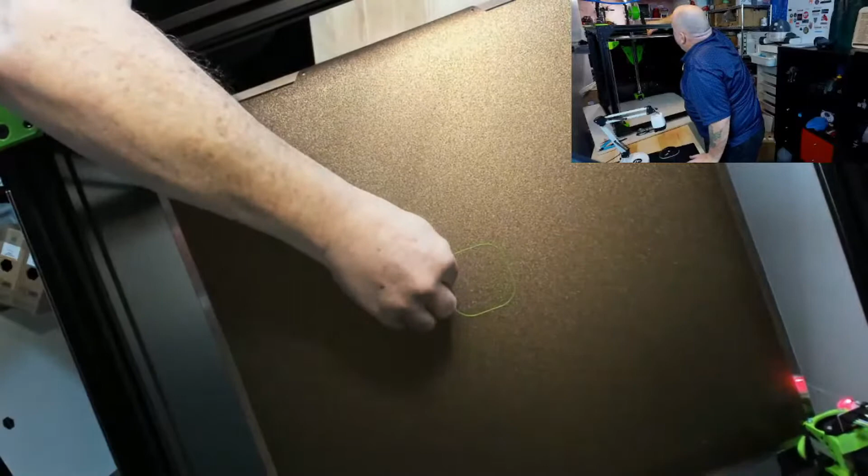So we're going to do that really quick, then we'll do a test print. What I did up here, just prior to the stream, this finished about 5 minutes before the stream. Let me get this off the bed too. You ever do that and get a piece of filament under your thumbnail? Ooh, it hurts. So let's have a look here.

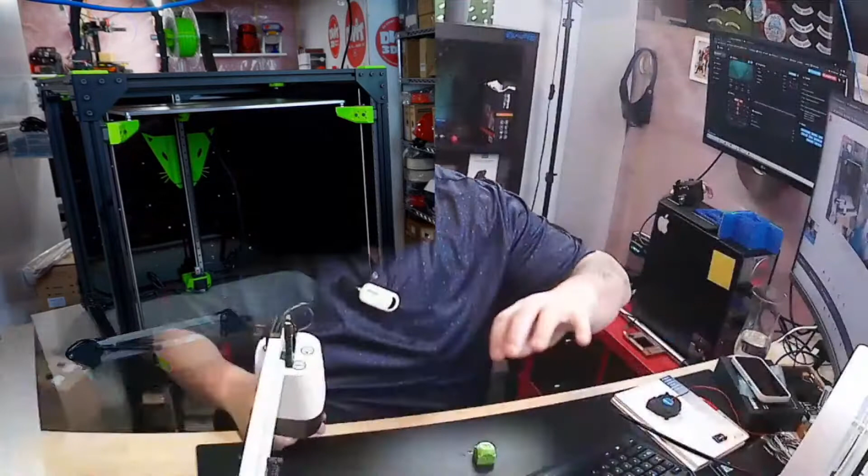I had sent Tom the STL file for the RatRig logo in the back of my case here. He'd asked me where I got it. I didn't find the file anywhere, I actually just went into Fusion 360 and created it myself - I vectorized their head and created the file. So if anybody wants it, reach out to me, I have no problem sending it to you. But I haven't put it on Thingiverse or anything yet - I don't really do Thingiverse as far as uploading stuff much, I'm not even sure how. So we sent them that. But thank you so much, Tom, much appreciated.

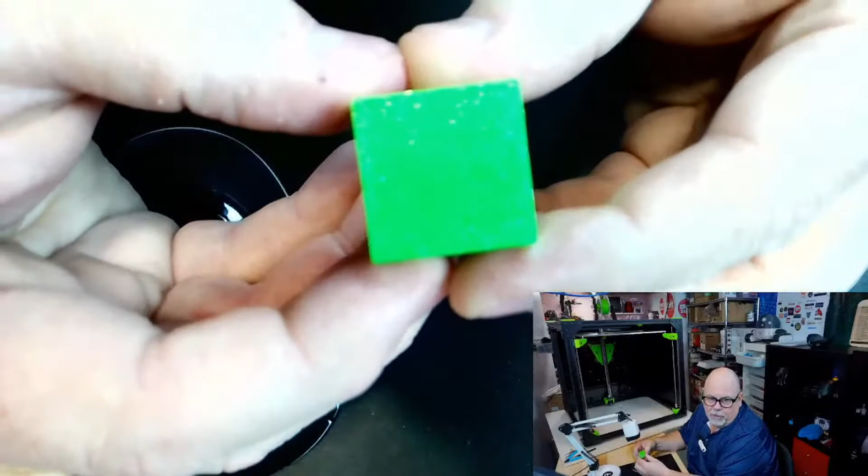So we did this cube just before the stream, and I'll show you - we still do have a little bit of ringing here, but when I do the calibration it should help it a bit. The bottom of the cube turned out quite nice. I have no problem with my first layer on this machine at all now that I've got my Z offset figured out perfectly.

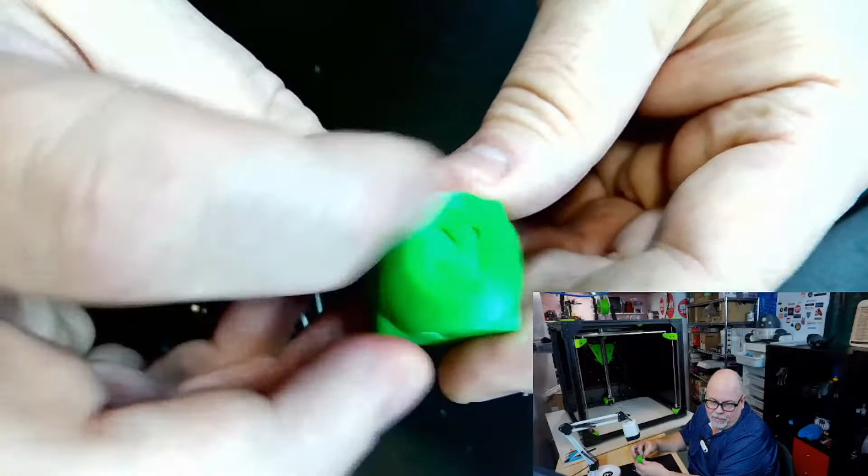X isn't bad - are you going to focus for me here? X isn't bad, okay. And you see on the Y, we've got some ringing on the Y. The back of the cube is not bad at all, and again on the other side there's some ringing because that's on the Y axis as well. The top turned out decent, other than right there, there was a little bit of bleeding of the filament at the end.

But the top and the Z look fine. So,

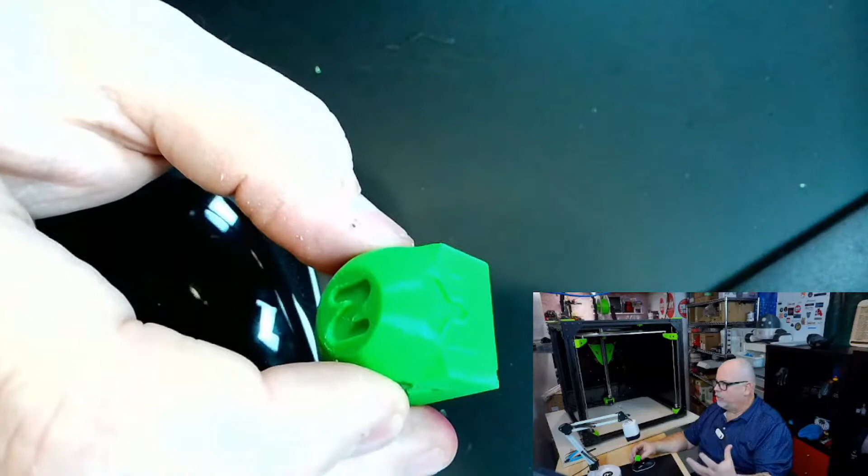Can you share a public link to the STL file from Fusion? I don't know, Jason, can I? From Fusion 360? Oh, I probably could. I'll look into that and see. I think you can, I think there's a way to go in from Fusion 360 and do a public link to my Fusion 360 repository or whatever it's called. I'll check that and see. Good suggestion, very good suggestion.

And I can also share the Fusion 360 raw file if somebody wants to go in and customize it. Yeah, that's a great idea.

So anyways, we're going to do the resonance calibration here again, and I'm going to reprint this cube. I had done a couple cubes last week after I fixed the hot end.

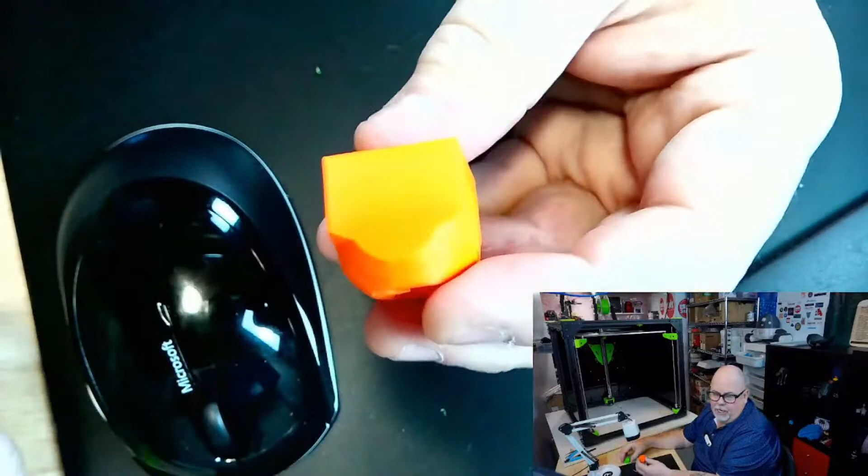I ran this cube in the PETG orange that I have on here. Everything I'm showing you right now is PETG, and it is working. Oh, and Jason says yes you can. Oh, I thought you were asking me if I could, and you're telling me I can. Okay.

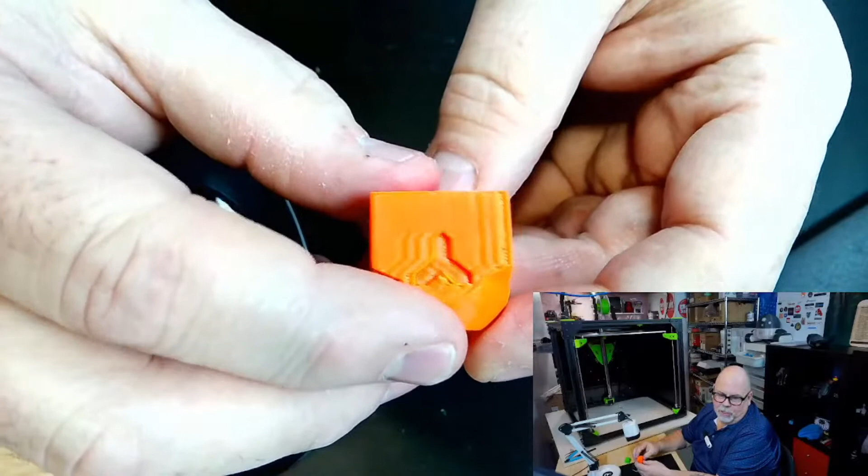So yeah, everything is done in PETG. Again, we had some ghosting or ringing on the Y, but the X looked perfect.

And then I ran another green one after. Since then I've run, somebody out there might know what this is for. This is a different hot end mount for this printer, which is going to be going on soon. If anybody can guess what kind of a hot end this is for, you win the Kewpie doll prize.

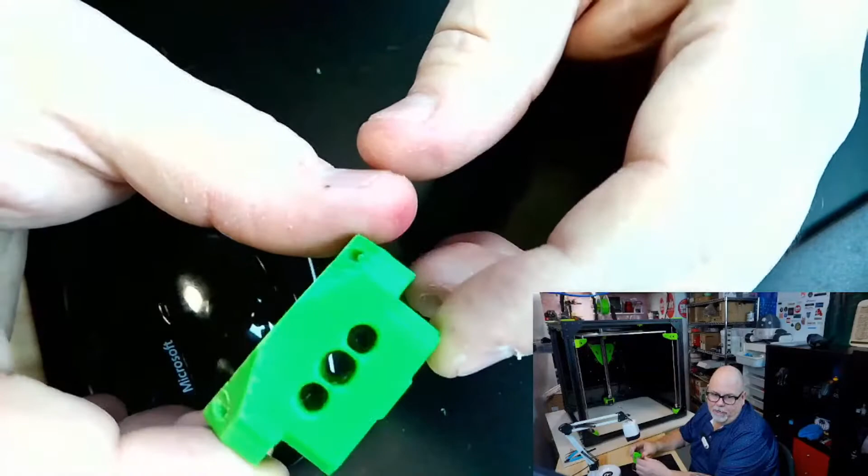But this is a new hot end mount for a new hot end that's going to go on the RatRig once it arrives, because somebody very, very nice is sending me a hot end very generously, and I'm going to be putting it on, and I've got the part printed ready to put it on the printer. So what kind of a hot end does that look like it's for? Hint, it's not for the E3D V6 hot end because it's not round.

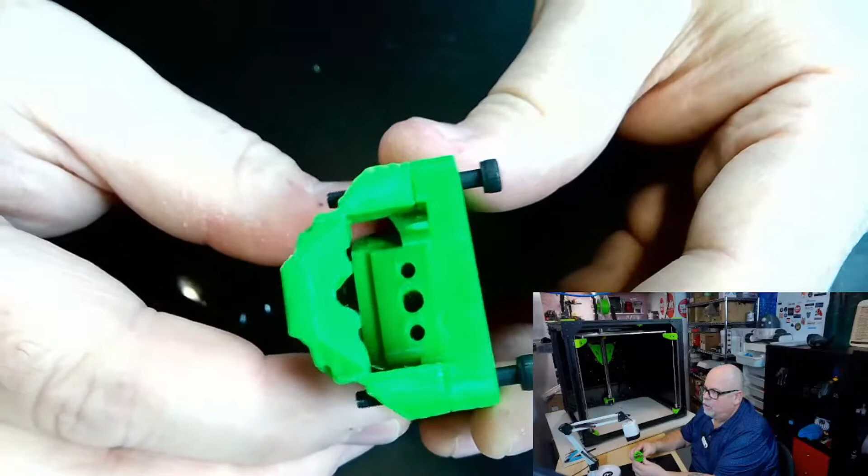Ooh, there we go. Okay. Jason, I know you know.

Then I printed these, these are all little parts, but these are nice looking prints. This was supposed to be an ADXL mount for the BMG extruder, but it doesn't fit. I don't know, maybe the person that created it has a full size stepper motor on it, because this will not fit with the pancake stepper.

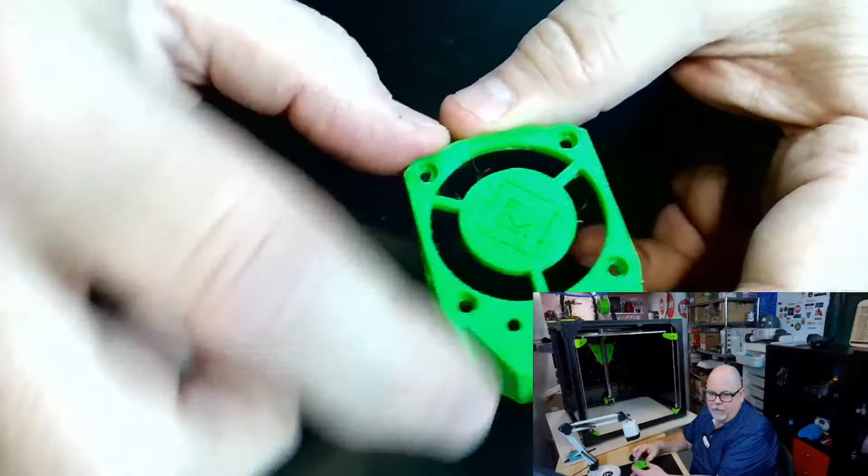It's too deep, so anyway, I've just gone ahead and put the ADXL back on the fan shroud on the front. And this is just another fan shroud idea I printed.

I haven't put it on yet. I don't know if I like it, but I just printed this again just to test the printing, and everything printed out quite well. So this thing is printing really well. I just want to do the resonance testing right now.

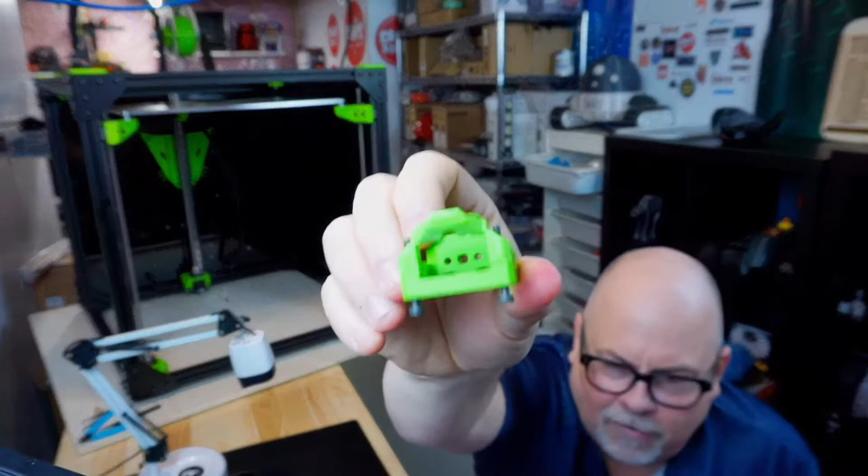It's an EVA mount. Yes, it's an EVA mount, but for which hot end? Aha, that's the trick. Which hot end is it for? I'll give you a hint, it looks like it might be a rectangular shaped hot end.

Anyways, okay, so we've got all those test prints. We did the speed benchy a couple weeks ago. That was, I wouldn't call it a speed benchy because it took 20 minutes to print. And it turned out not bad considering it was having some cooling issues, obviously, because of the speed.

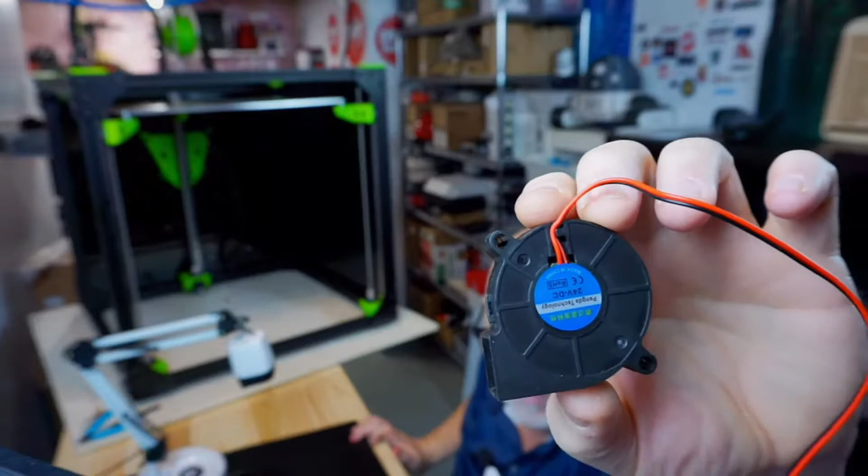And I've heard that a lot of people are putting dual 5015 fans. Oh, and I did last week as well. I changed out my part cooling fan from this one because it was making a lot of noise, it was starting to go when it started up. So I put a ball bearing one that I happen to have in my stash here. So I did switch this fan out as well.

So I looked into doing dual fans like this, but I don't know at this point if I need it. So we'll see what happens.

So without further ado, smells like oranges. Does it? Does it sting sometimes, maybe? Like you swat it? Anyways.

So what we'll do here is I'm going to go through, I'll show you what I do as far as this goes. I know we did this before, but hey, we got to show some more stuff here.

It's sending frequencies starting at 5 hertz and going all the way up, counting the frequencies. If I give you the overhead view of the printer and remove that, you can't really see much, but you'll hear it.

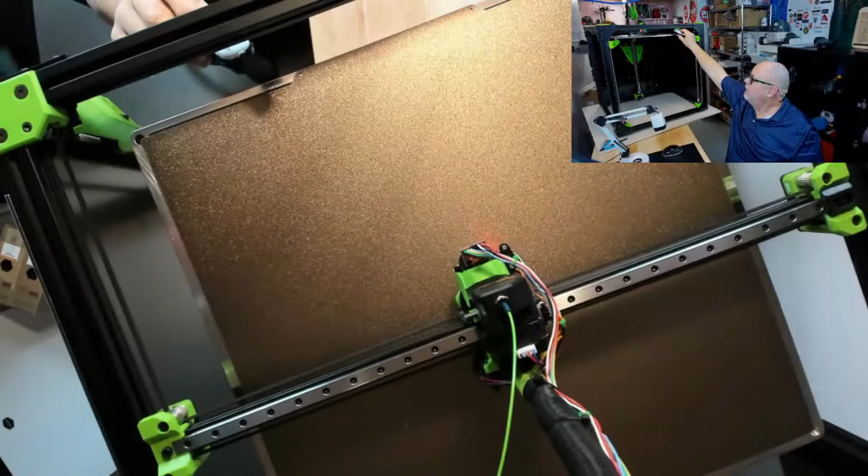The printer's making a fool of me on camera, I know, but look, it's working now. You'll start to hear it - it sounds like a motor revving up from a very slow idle to a fast rev. I shouldn't have touched that while it's doing it. I've got my mic up there so you can hear it - here it goes.

First, increase to 7,000 - they're already at 7,500. Pressure advance to 0, but that's just for the test print, isn't it Jason? Or should I do it before I started this? I know that was when I was running the test print and actually measuring a print, but do I want to do it before I do this as well?

There you go, now the humming is getting lower and lower. It's at 81 hertz, 83 hertz, 84, etc. Never mind, I'm good. Yeah, I know I do that before the printing portion.

So as you'll see here, we're up to 106 hertz. And then I think it goes up to 130 something hertz on it. Not that it hurts, haha, get it? See what I did there? So we'll let this run its course. And so we're at 126, 127. And the hum just gets sort of more and more relaxing. I could almost sleep to the hum of this thing.

Okay, now it's finished, and it's going to do some calculations. So it's waiting for calculations. I believe this was the X - let's just have a quick peek. Yeah, this was the X-axis it was testing. Okay, and now it's finished the calculations for X, and it's disabled the input shaper.

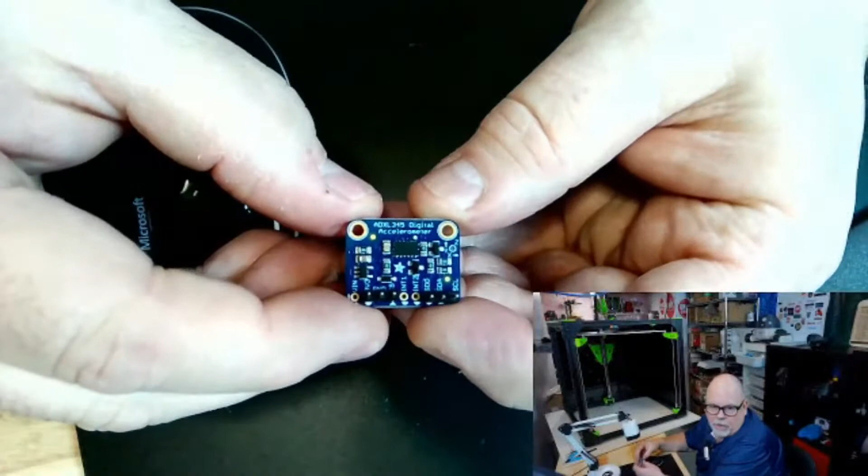So this one's going to go through the same frequencies for the Y. And while this is going, I will show you another little thingamaboober here. My first accelerometer I got was this one, which I picked up directly from Adafruit, the ADXL 345. But this one would not work for me. I've got the pins soldered in here correctly in the proper holes. You only need to use 6 holes on this thing. I have the proper holes selected, but it just would not recognize the accelerometer at all. So I ended up going local and buying a different brand name accelerometer. The only difference was the pins for the ground and the power were switched, which is not a big deal. And that's the one that's on there running right now.

So this is obviously a bad accelerometer. I don't think I'm going to bother for the low price of it sending it back to Adafruit. I may even try it again and just see if it was something I was doing wrong. It could have been my bad wiring, because I ended up having to make the wire loom 3, 4, or 5 times.

And Jason, you'll be happy to know that the wires going into the accelerometer there, I did rewire the whole thing for longer wires, and I do have triple plugs on the hot end part, and on the back I have a double and a quadruple plug, so I don't have to plug individual plugs in anymore. So there we go - I got really good at crimping those little tiny pins that I can hardly fit in my big fingers, but it's starting to work well.

So okay, we're up to 122 hertz on the Y, and then we're going to print that cube one more time. I do have a feeling that we're still going to see a little bit of ringing in the Y-axis - I don't know why. The only other thing I can think of that I may need to do is tighten my belt slightly.

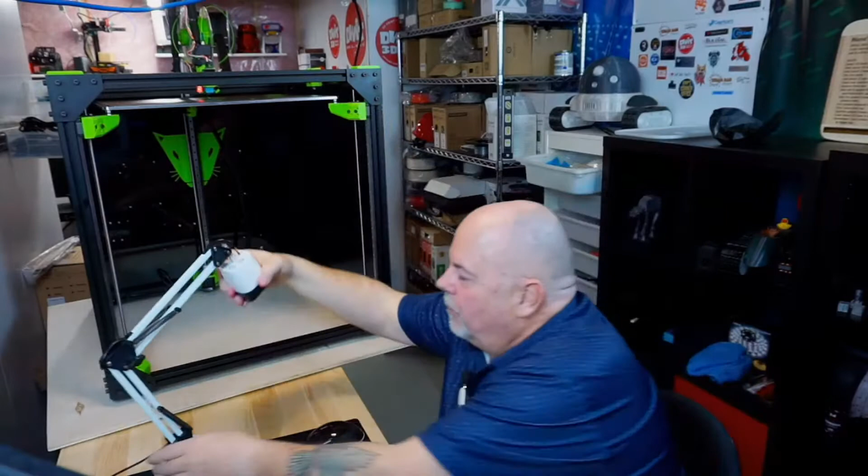David, yes, I left the ADXL permanently wired now - that was last night. I made a long wire loom for it last night, that's why it's still hanging outside. If you look up here, my wire loom for the ADXL is just sort of tacked on to my other loom because I didn't have time to put it away. I'm going to leave it on there permanently, so if I move my printer around or put it on a different base, it's a pain to plug it in and feed it each time.

So you've done both ways, not much of a difference, Shane - that's what I've heard too. Jason says either way is fine. Stephen does the hot end because it's the way it's being used. But pressure advance can allow for some of that stuff too - you can do a pressure advance test. E-step calculations in conjunction with pressure advance is probably the most perfect you can get.

Okay, so we're all heated up. This is going to start printing any time now. Let me switch to this overhead view for you guys so you can actually see what it's going to do. There goes our prime line, and there goes the print started. Kind of like this overhead view. I'm going to put my close-up camera up there a little bit for you guys too.

RatRig V-Minion, have you heard? V-Minion - have I heard what?

No, I haven't heard. Usually without the hot end, you've done it and then change flow for each filament. Okay, yeah, I've heard both. I've had success with doing it with the hot end - I don't seem to have had a problem with it, but maybe one time I'll try with both.

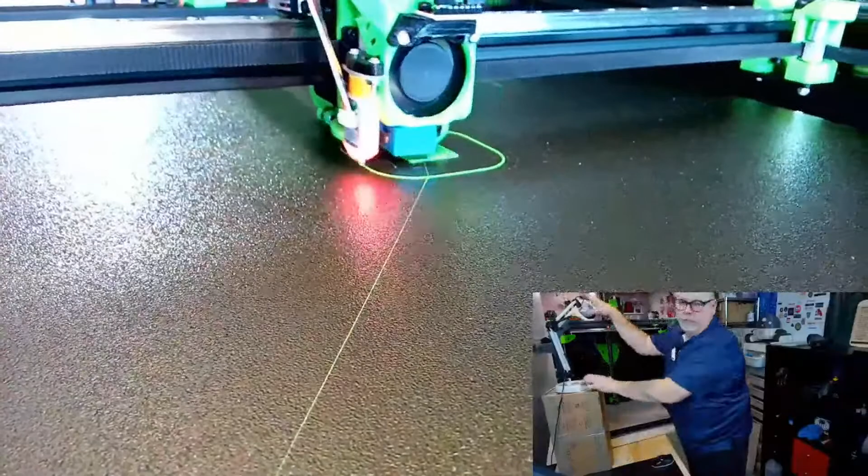There we go, look at that. Oh, look at that long string that went over there. Ooh, come on out.

I always like to take my purge line off before the print's done - I'm guilty of that. The bed is hot. So we'll let this guy print and we'll check it out.

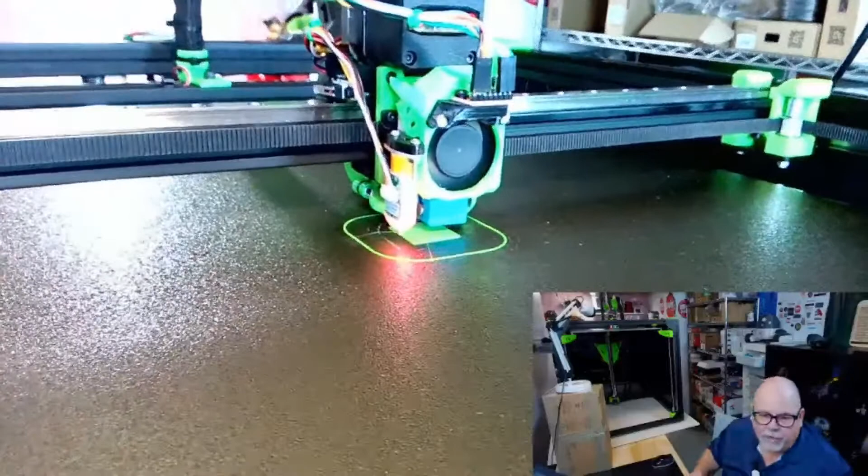In the meantime, I want to print something a little bigger, but I don't want to print- oh, there goes that fan. Let me turn that down to, heck, 20% is fine.

20%, and it sends an M106 S51. S51 must be 20%. Look at that.

Do the same - oh, you do the same, Karen? Yeah. Well, let me look, what did you say?

You said RatRig V-Minion. Let me Google.

What are we looking at? V-Minion Beta. Let's have a look. Oh, okay, it's a Cartesian. Look at that.

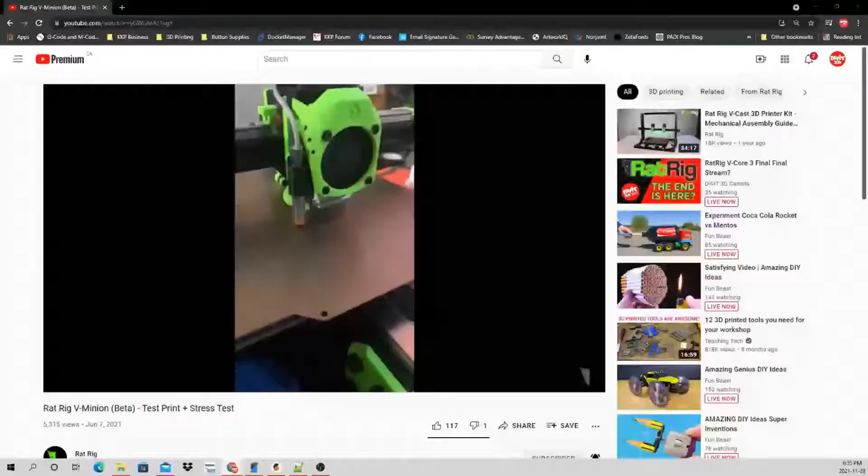Another Prusa Mini clone. Wow, look at the quality of that on that little video though. Let's see if I can share this with you guys so you can see what I'm looking at here.

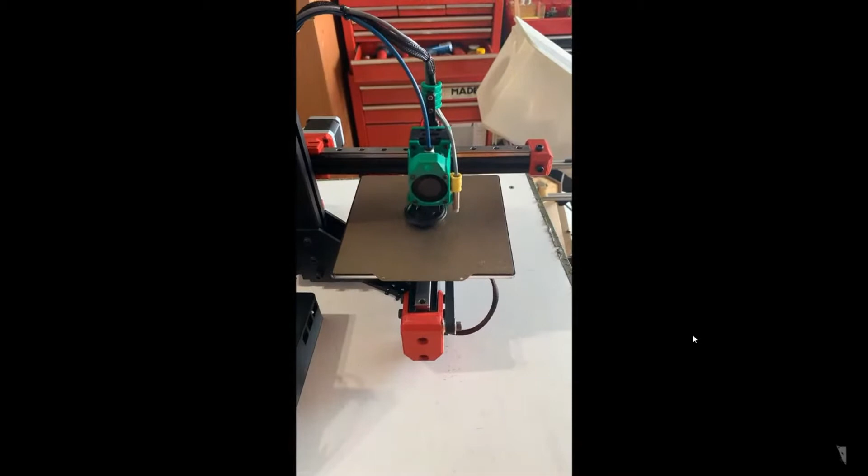So that's what he was saying here. Let me back that up a bit. This is the RatRig V-Minion, and again, a Cartesian style. Looks like another Prusa Mini clone. Watch the quality that they show coming off of this though. It looks like it's built pretty beefy. I'll have to check and see how much that goes. Look at those layers. That's awesome.

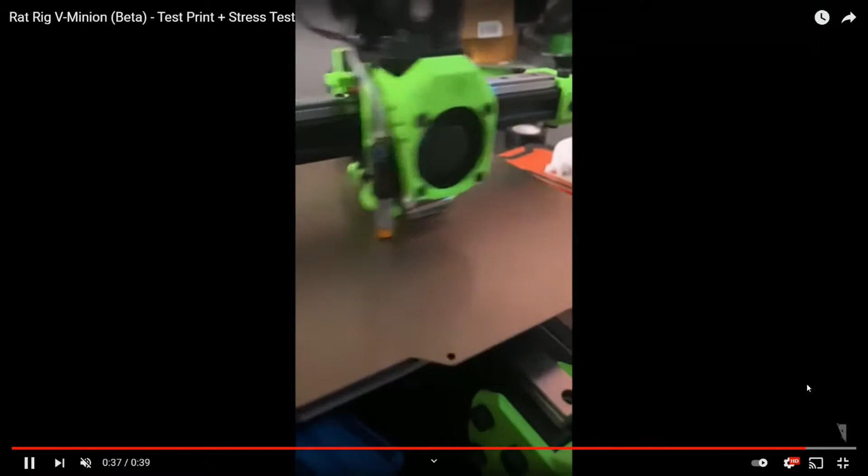PINDA probe. That's got what looks like a mosquito hot end on it. Yeah, that's pretty interesting looking. That looks pretty interesting, cool.

So now we have the Prusa Mini, we have the Ender 2 Pro, we have the RatRig V-Minion now. Who else is coming out with one of these little guys?

Prusa Mini is a clone of another printer. I'd say it's a clone of an Ender 2. Was Ender 2 the first one to come up with that style printer? I don't know, I haven't been in the 3D printing industry myself long enough. I'm only in my third year or something.

Pick is fuzzy. Oh, the close-up camera pic? Looks fine on my screen. Let me look on YouTube and see what's going on. My YouTube is frozen. That's a bit fuzzy. Let's see, what am I watching at? What resolution am I watching at? 1080p.

Yeah, that camera focuses in and out sometimes. Sometimes it's better for me to manually focus it. Oh, I'm fuzzy? You mean here or overall fuzzy? I look very sharp in my camera.

There's a cantilever Ender, the Ender 2. Yeah, let's see. Comes with a handle and all. For those of you that didn't see my stream on this, let's see, right here, there's the Ender 2 Pro. Belt tensioners, cantilever. It's about the size, well, a little smaller than the Prusa Mini build size, but yeah.

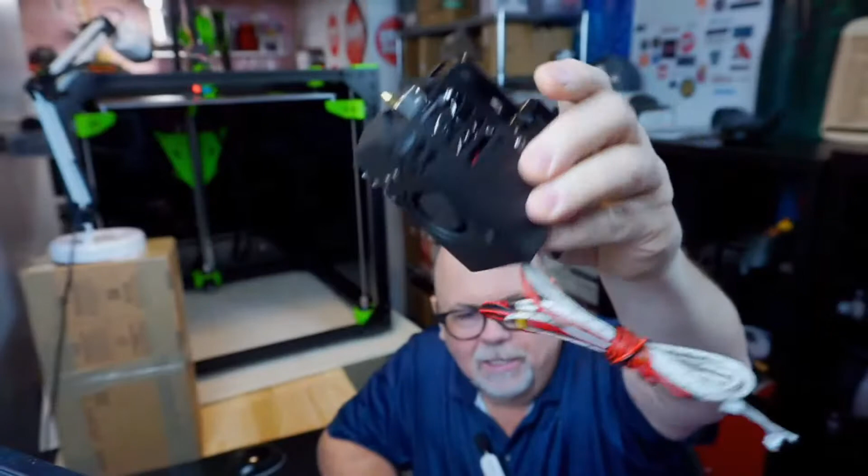I am going to be upgrading my Kingroon to this hot end that I got a long time ago. It was sent to me, just sent to me. I didn't order it, it just came in the mail one day, and it took me up until about a week or two ago to realize it's an upgraded hot end for the Kingroon. So I'll be putting that on as well. We will be doing that.

Well, the other thing to discuss, since my good buddy Jason is on this stream, I wish the Prusa XL would be kind of bigger, like at least 400. Well, you think about it, this RatRig 500 is a lot less money than a single head Prusa XL. So, you know, I think that any printer can be tuned to print extremely well. So you gotta look at that.

I have this really cool Samsung Galaxy tablet. You know, the way I connect my PC to my printer is I go to a website or a URL called ratos.local.

When I go on my browser on my Galaxy tablet, it will not connect to ratos.local, and I don't know if I'm doing something wrong. If anybody knows, I know Shane and Jason are on here, there's a lot of techie guys on here, but why wouldn't my Chrome browser on this take me to the same place as my Chrome browser on my PC and let me see the Mainsail interface? Is it a Samsung issue? I've got this tablet I won last year that I don't use for anything. I thought it'd be great to run my RatRig with, but it won't hook up.

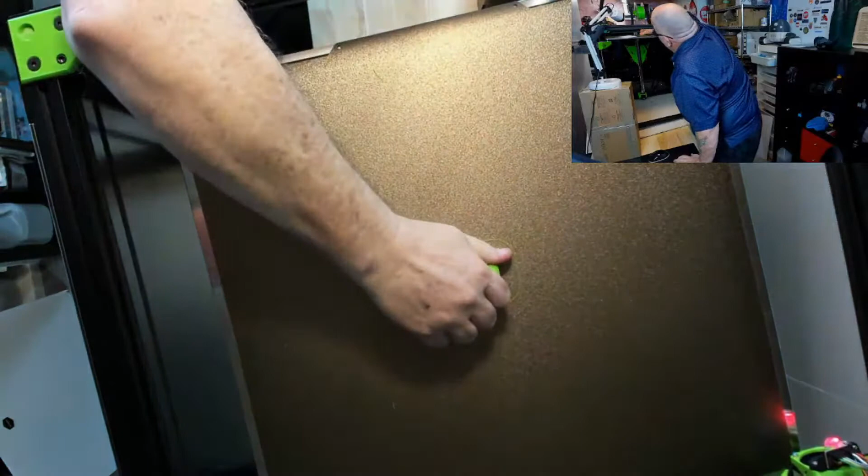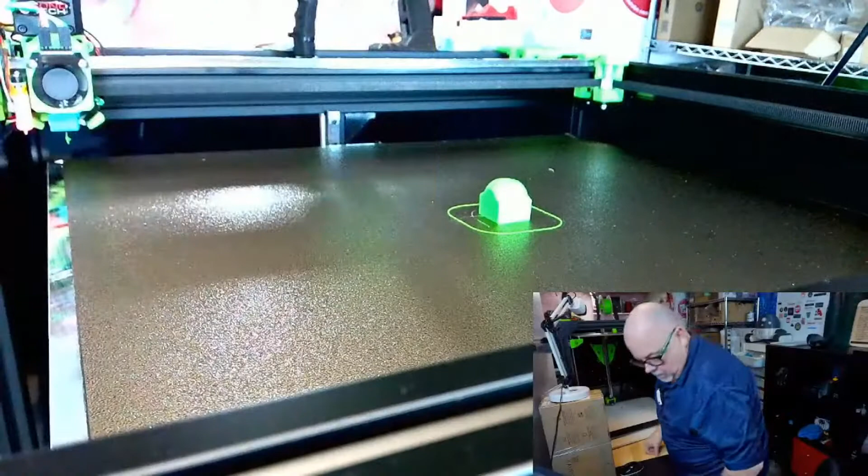It came broken. Yes, there we go. Okay, let's pull this cube off. Oh, okay, that's really good bed adhesion, just so you all know. Very good bed adhesion. Let's do this camera. I need to find, there we go. I'm just going to pull my skirt off. Don't get excited, not that skirt.

Android OS is hard configured, so it will not see devices in a local network. So how do you unhard configure it? That sucks, that really sucks. I wish I'd have won an iPad.

Okay, here we go. X is not bad. Now, but Y, still got some ringing on the Y. And I suspected we might, so I may look into maybe snugging my belts up a little bit. Because after doing that resonance test, I don't know why I would have so much ringing happening. I mean, the print itself looks great other than the ringing. I mean, look at those layer lines, if I get up really close, I mean, you have to really struggle to see the layer lines.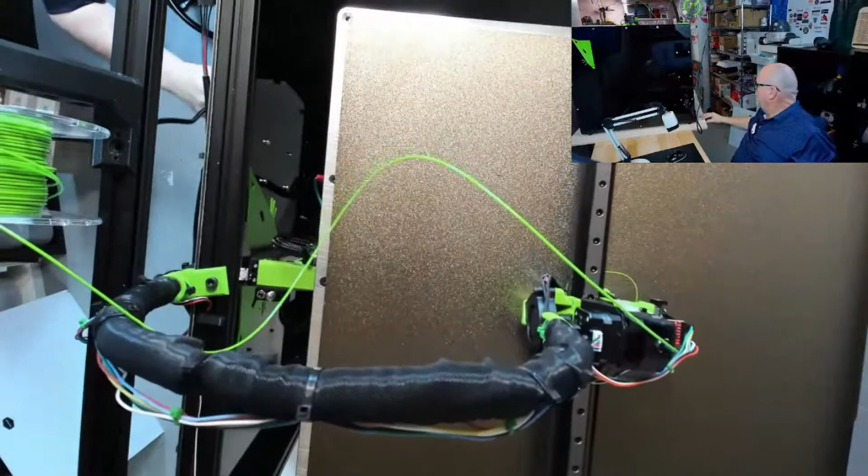And I'll show you my final kind of layout in the back. So on the back of this puppy, there we go. So just ignore this, this is just my power cable that's coming from the ceiling, but that's kind of my final setup. Yeah, I know some people who are OCD are going to say come on, clean up this wiring a bit, but you know what, it works for me. This is just the 80XL wire that I've got tucked in there.

This is so cute, that's the Raspberry Pi Zero right there. It is tiny, it is really small compared to the other Raspberry Pi that I had on it, if you look at them side by side.

So, but it's working, not a problem with this little guy at all. It doesn't get hot at all, there's no warmth coming off that chip. Close that off. But yeah, that's my complete wiring all done, I never need to mess with that.

I do have a plug sitting here, and the other end of that plug is way up here. That was for when I had the little display, the little panel display, which I haven't been using right now. So I don't know what I want to do for an on-printer display yet, but I've got to figure that out.

So you can attach the awesomeness, also known as the Creality pad, to the RatRig while we wait. Well, but...

John, I thought it needed to be running, you know, that other firmware. It's been so long since I've used my other printers. Ay, ay, ay. Oh, I don't think this will work with Klipper. Bottom power supply looks tilted.

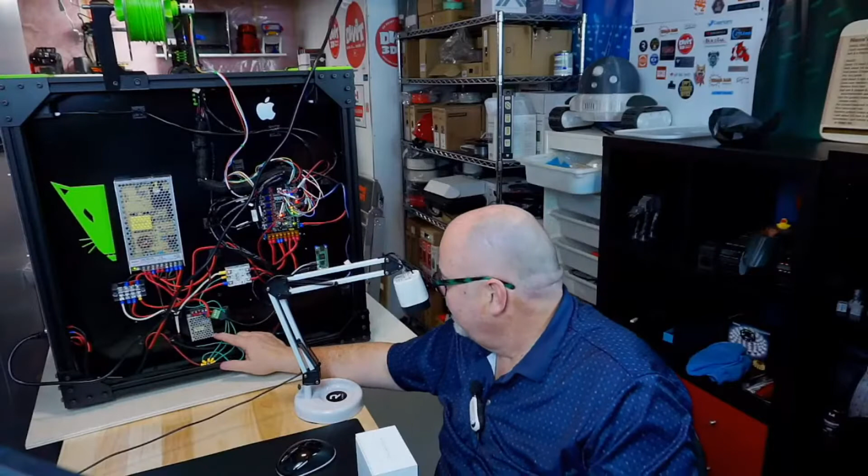Stephen, you were here for the build in the early days, I assume, right? I never did fix this. That was pointed out in more ways than one. That is crooked. It is crooked. Yes, it is. That's the power supply that's powering the Pi.

So when I bought the Pi Zero, I had to get an adapter for my USB going into the SKR board - a little adapter to go from USB-C to USB-A, I guess. And then I needed the same adapter from USB-C to USB Micro to go to the power supply, which is powering the Pi. So yeah, it's getting a constant 5 volts from this Mean Well. That little guy on the bottom here is a Mean Well power supply as well.

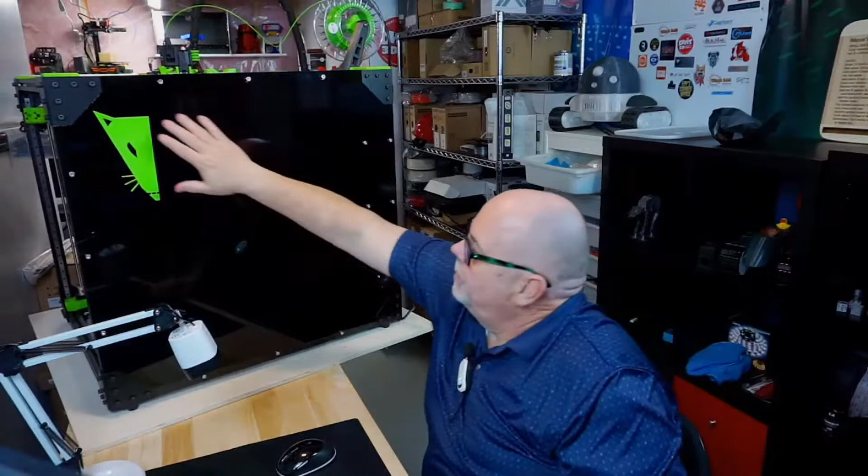So there we go, put a logo over here. And there we go.

So for down the road, I've got some spare parts, including - I picked up this beast because it was a good deal - so we have the Octopus, and we have the steppers that go with the Octopus. So we have a couple of those things, some spare parts there, for who knows what projects are going to come up down the road.

We have a few things going on. We have the upgrades yet to do, which are right back here. I have the upgrades for my Prusa MK3S Plus. I've got the upgrade kit for the Prusa Mini Plus, and basically that is simply a new Pinda probe, a SuperPINDA probe - that's coming up. I've got the Creality 3D pad, which I'm going to be attempting to get to work, and I have a touch screen for an Ender 3 V2.

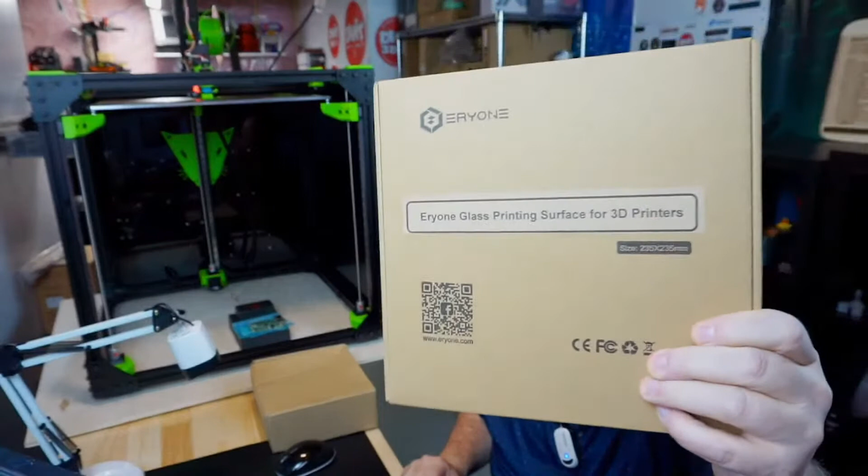I have a few different things I've been meaning to get to. A lot of my planned streams got put on the back burner thanks to the RatRig. But there's the kit for the MK3S Plus, which has a lot of printed parts and hardware, so that's going to be a full stream. And then I've got this - it was sent to me, I need to test it yet. It's apparently a scratch-proof printing surface from ERYONE, 235 by 235, so that'll probably go on an Ender.

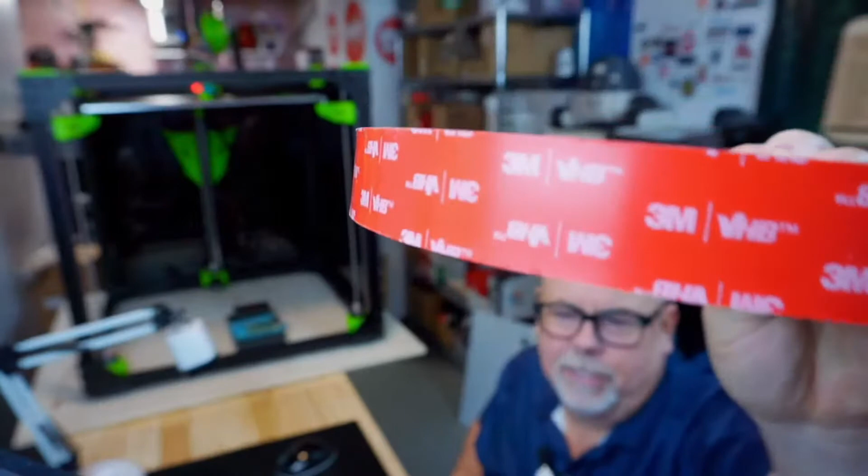X-Photon Tom, I did mount the logos with double-sided tape. Through my sign shop I get some pretty good stuff I use for that, a couple different ones. I have 3M VHB tape - this is a pretty simple flat one - and I also have this thicker foam tape, but it's extremely strong, will mount pretty much anything to anything with incredibly strong shear strength. But I just use tiny pieces, because if I change my mind I want them to come off without having to use a jackhammer.

Let's see, did I miss any other questions up here? No, okay. How are we doing on the print up here? Let's see, overhead - I can't really tell, but it looks like we're about 30% of the way done.

Could the RatRig be built in a way that all the electronics are on the side of it? Yeah, and as Jason just said, I don't see why you couldn't put the electronics anywhere. You could probably have a separate electronics station off to the side too if you wanted. It's just a matter of cable management and running all your cables the way they need to be.

Let me have a look up here and see if I can see any ringing happening on this one. Yeah, there's still Y ringing on this one - not as bad though, but it's still ringing a bit. So I'll have to play with those different settings.

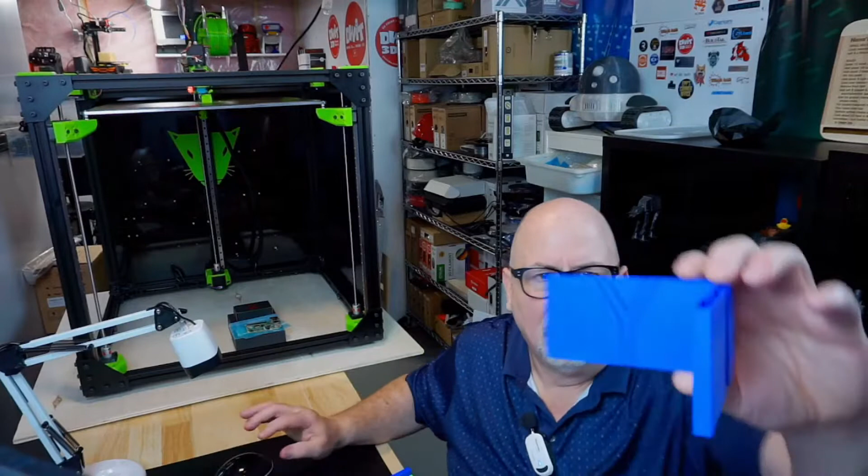I ran this one here, and I'm trying to figure out what the difference is. This is back before I upgraded, or before I was having all those software issues. Where is my window? There we are. But I ran this one, and we had some really good results.

Look at the Y there, and look at the X there. Okay, and that's beautiful. Virtually no ringing, nothing at all. So we had it to that point.

Then we started changing things, and I think this was before I started having some software issues. So yeah, it can be tuned for sure. I just need to figure out everything that's got to be done to get it back to this point. This was manual, before I had the accelerometer, actually.

So I may just end up going back and doing one of these again. And again, I still think being on the Lazy Susan is not helping matters.

Yeah, it's printing good, it's printing quick. And I could get rid of that ringing by slowing it down. Like right now I'm printing at 100 millimeters a second. I could definitely slow that down.

When I do my big model I've got to do, I'm definitely going to slow it down because there's no rush. I'd rather have it take a little longer and have a little better quality. So...

Let's see, I just downloaded it. Where did it go? To my downloads, I hope. Oh, why is it a zip file? There we go.

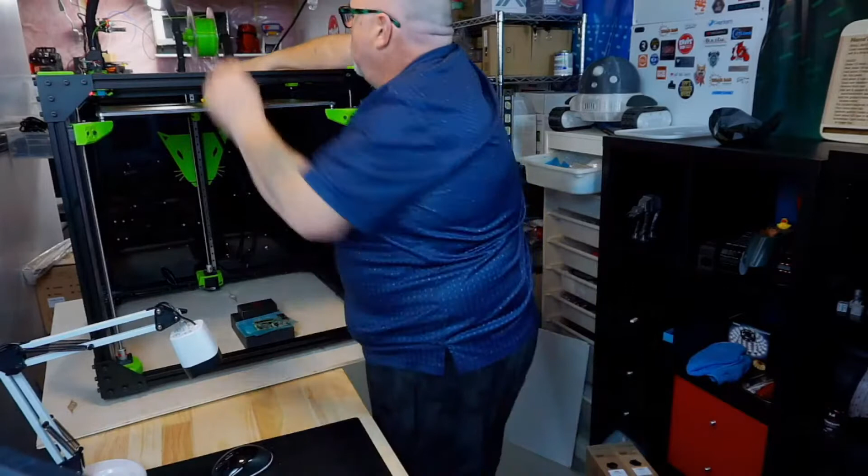Oh, that one went across the room. There we are. I'm not going to complain about bed adhesion with this.

So yeah, there's still a bit of ringing on the Y. There we go, it's not as bad. But again, my X-axis seems to be doing really well. My bottom is doing well. I got a little hole there, right there.

Yeah, we need to work out that little bit of issue on the Y. But it's consistent. I mean, the quality is consistent through everything.

Let me get rid of my skirt. Not that one, I don't usually wear a skirt. I print with the skirt. Come on.

Oh, I have not yet. I haven't had to clean that bed in 10 or 12 prints.

So need to add safety net or backboard. Yes. Yeah, exactly.

Okay, oops, I had the wrong camera on there again, of course. One-man shows, having to switch the cameras, etc.

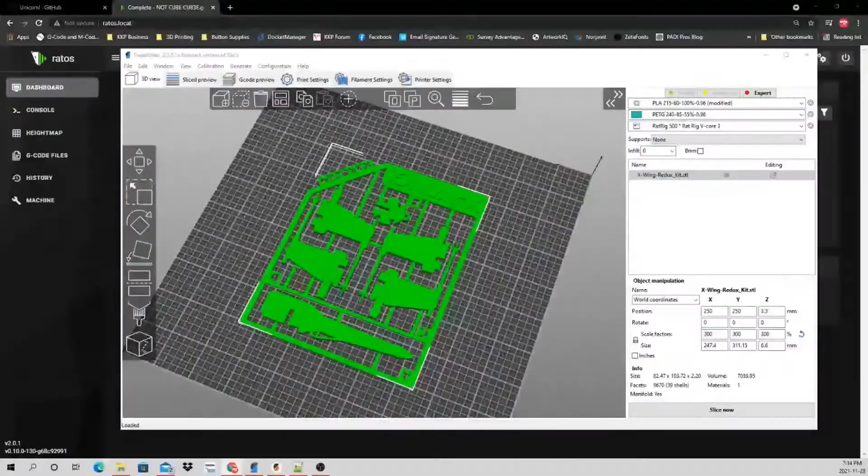So I'm going to bring this up. 300% is probably a bit big for this guy, but if I pull that over here and put this screen up, we'll print this little X-Wing model. That's massive, that's going to take way too long.

4 hours, I don't think I want to do 4 hours. 200, we'll speed it up.

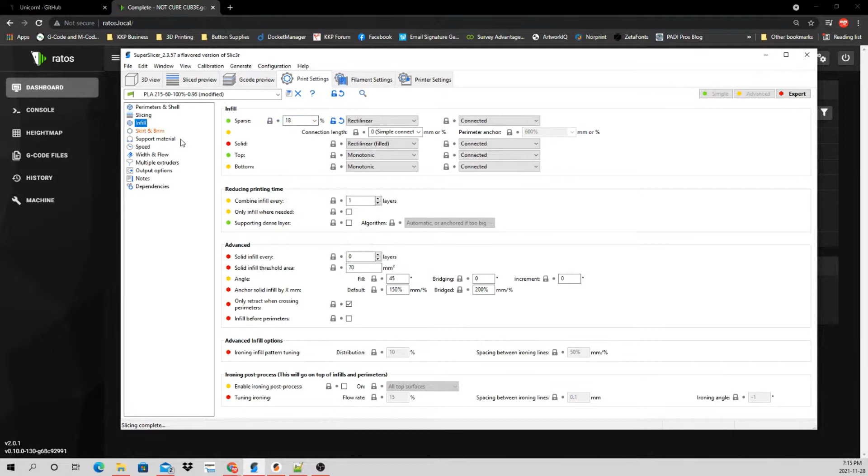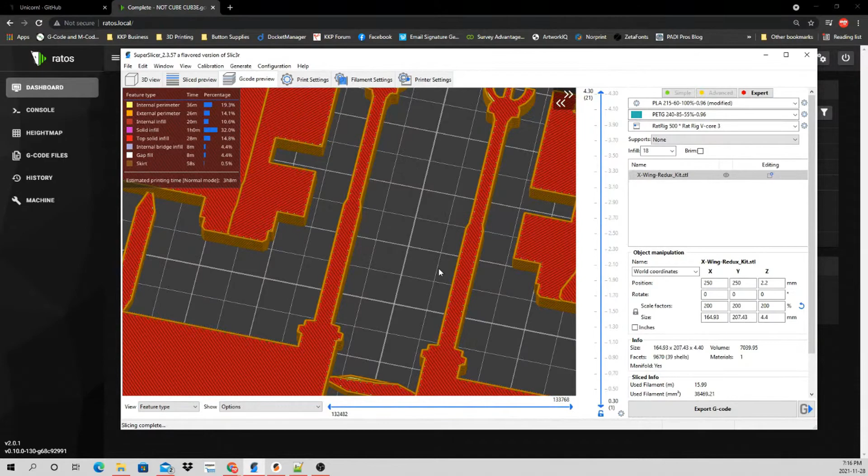I think because I've got, so we'll do 2 perimeters, 3 bottom, 3 top, just to get this going fast. Infill and speed, we'll speed it up when we get to the actual print. It's going to take a while, but I'll speed it up. This is going to give me a good idea of bed adhesion on the first layer for something with intricate details, especially where these parts join with the snap-apart pieces.

Okay, so we got that sliced, no problem. Let's make sure I've got my filament settings right. My cooling should be down to about 55%, that's fine. And my filament's 240 and 85, that's fine. Okay, so we'll export the G code.

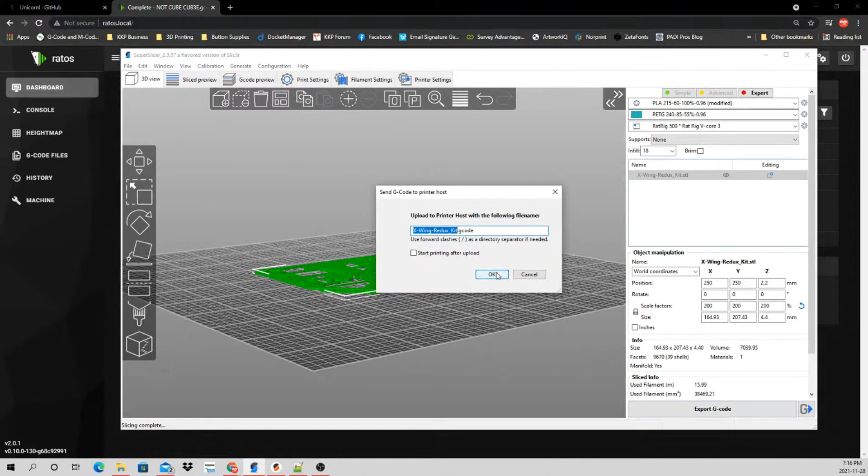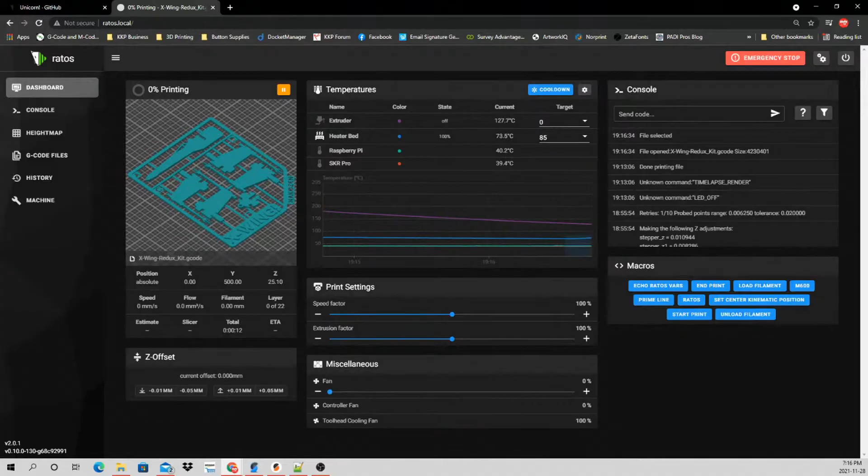Done. Bring it in here, come into here. And there's the X-Wing right there, and we'll say yes to print it. And there's a nice little preview thumbnail there. We'll crank the speed up once it starts.

So yeah, this thing is printing PETG beautifully. That's what I've had on here, the green stuff right now, which I'm actually kind of wasting, but I got 2 more full rolls of it. The green PETG that's on there now is basically the RatRig green PETG that I got from a company out of Poland or somewhere like that. I forget, it's called the Devil filament or something along those lines.

We are going to do our 3-point leveling, which is in the G code for every file, which I'm fine with. It hasn't been out of level too much, it's only had to probe it once each time so far. So if we see here, right over here, that was 265 on the first probe, 268.

So this will have to probe it again because it's not going to be within tolerance. Yeah, it's 0.031, and the tolerance it allows is 0.02. So it'll probe it a second time, and it'll be fine. And it'll be fine on this second go-around for sure. So there we go, 262, 259. Oh, it's going to be a little off on this one too. Wow, 3rd time's a charm. It usually only has to do it twice.

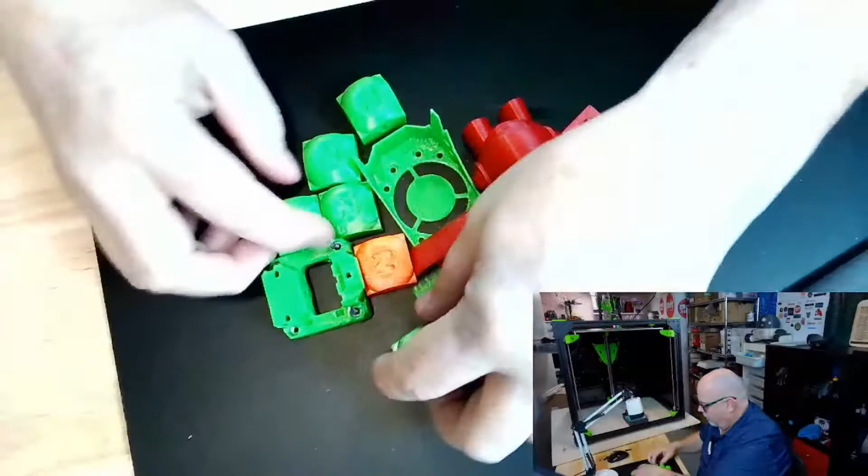Look at all the little test prints, let's pull these out. This is all the little test prints that have happened over the last week or two. Let's get this camera up. We've got some of these little top round, not square, round cubes that have been done. We've got the mosquito holder, the fan shroud, the quick benchy we did, and Marvin, which turned out really good, other than his saggy crotch. And then some other little test cubes - the last couple weeks worth of little test prints to get this thing all tuned up.

So not too bad. You were all engrossed in the first layer. Okay, well there we go. Let me not take you away from that engrossment.

It is kind of cool to watch it. It's a neat pattern. Let me see if I can get that light angle a little better. Is this any better? Oh, maybe, just a little more this way. There we go. Interesting pattern.

And I don't think anything's lifting. If I get up close, oh no, it's a perfectly flat layer. Boy, does that look good. I wonder if I can show you this with this camera. Let's see if I can get this to show - if you look, there's no threads, nothing coming up off of that. That is perfectly flat.

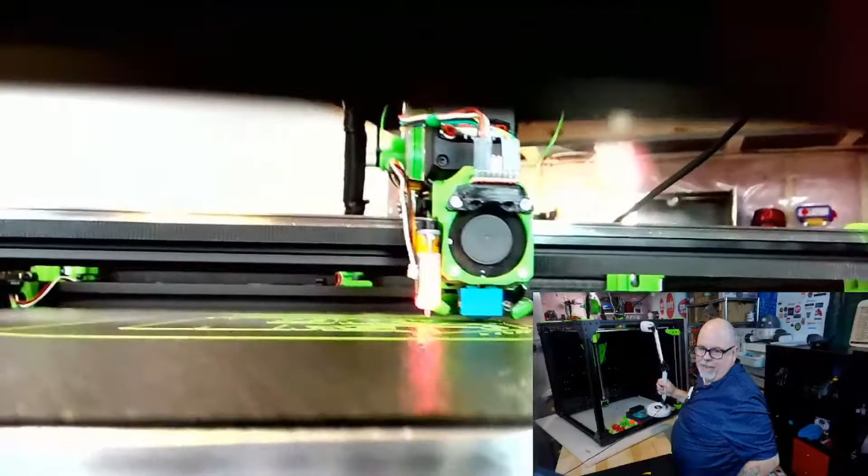Almost looks like a floor plan to some secret government building or something, doesn't it? Wow, that does look really good.

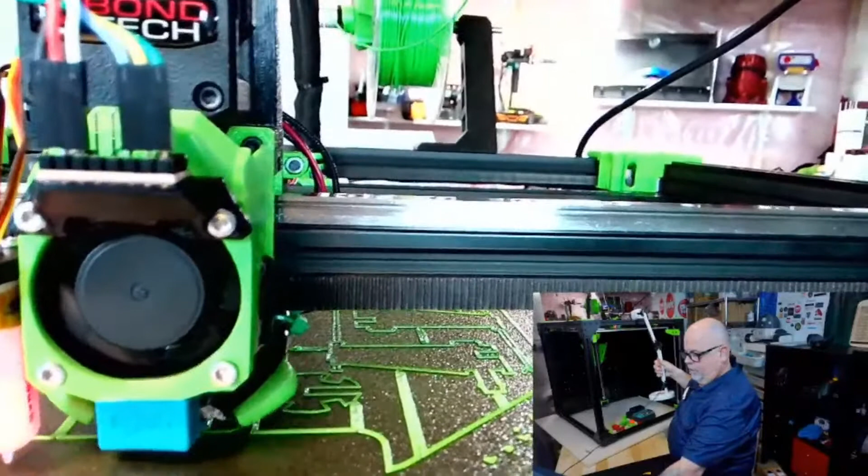Actually, let me get this up in a box. It's a better view anyways if I put this up here, and then sort of like this. I'll back it up a bit. Come on. Whoa, don't want the light on.

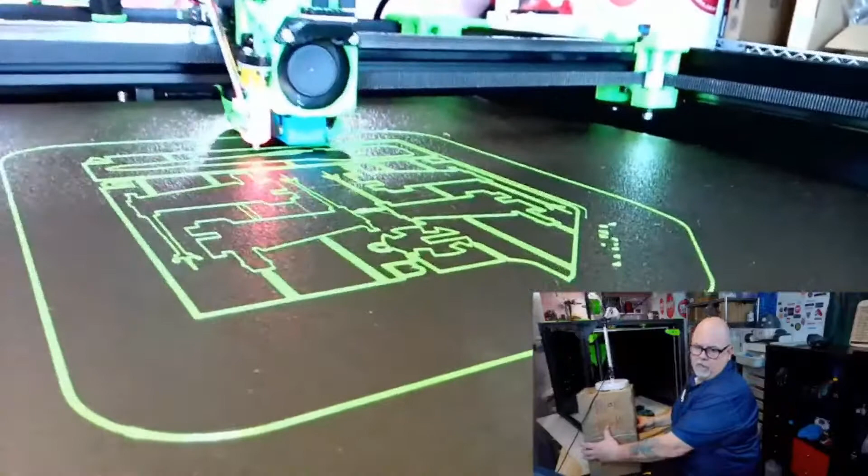Dang. Now it's blurry.

What am I losing? Something about a skirt. Oh, we're getting back into the skirt topic again? Wow. Wow.

I don't like that little reflection there. Can't do much about it.

Okay, I think I'm going to get to the point shortly here where I'll speed her up. Although there's some pretty intricate parts and you don't necessarily want to go too fast on some of them, but there's got to be some bottom layer infill happening soon.

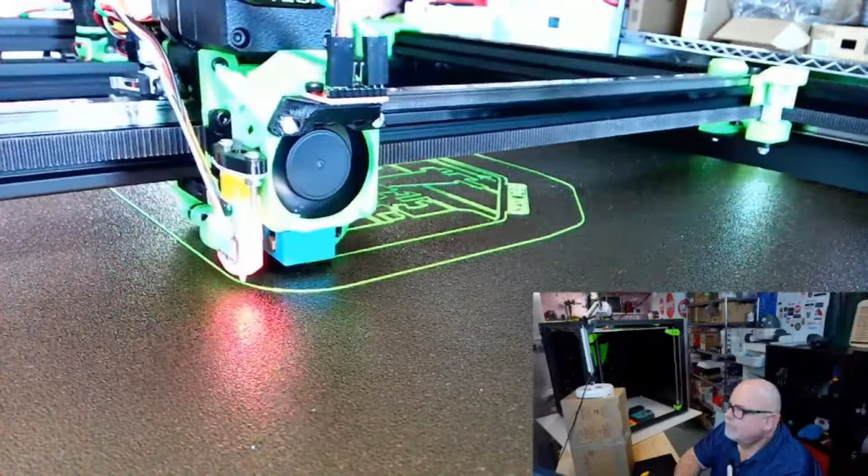So it's going to change the ballgame a little bit too when I put the mosquito hot end in here, because apparently that's a little better hot end than the V6.

I'm just starting to hear the blood flow. Okay, John, hope you feel better. You still get phantom pains after all this time, I would imagine, huh? Wow, that sucks.

Yes, Karen, I did finish the build and actually had it printing before the birthday, for sure. It wasn't necessarily printing the back, but it was printing. Oh, there we go, some first layer infill.

Let's have a peek up here. Oh, that looks great. Oh, I love this. The camera does not do that justice as far as how good that first layer looks. I mean, that is just beautifully - as smooth as a baby's butt.

Looks a little crooked like the 5-volt power supply. Yeah, okay.

Oh wow, John, that sucks. I hope that doesn't last too long.

Wow, I could eat off of that. It's so smooth. There's a little bit of a lump right there. I'll let it go.

We'll go for about another half hour if anybody wants to chat a little bit more. We got through this pretty quick tonight. There wasn't a whole lot to show other than the fact that, yeah, this was working, and I just wanted to go over what happened last week, why things sort of went south last week.

And it was mostly due to that hot end fan not being plugged in, not working. So I plugged that in, and I had to replace a bunch of hot end parts. Fortunately, I had a spare V6, pretty much mostly a spare V6 hot end for my Prusa, and it's the exact same components as this one. So I was able to swap out the block and swap out the heat break.

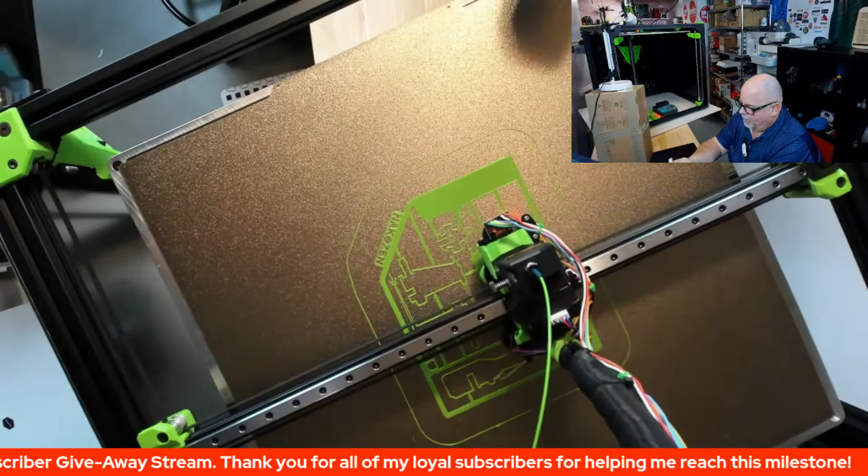Hang on, I got googly eyes from my wife. Aw, nice. And it's going to be, where's my calendar? Let me see. C for calendar. Calendar. Going to be...

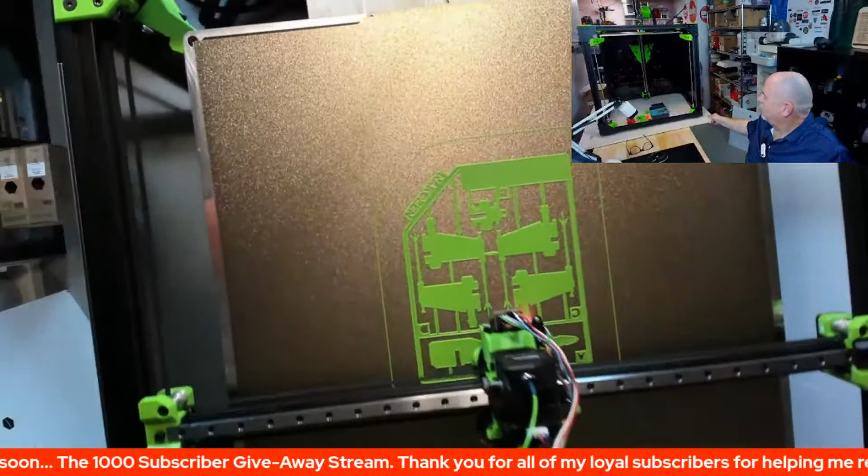Oh wow, come on, stop rocking so fast. Stop, oh I got to put something under that. That is really shaking, shaking like a leaf. There we go.

FLSUN, won't you come and wash away the rain? I never... now I'm not going to not hear it.

Oh, this is looking pretty decent. Yeah, that looks great. Cannot complain about that. I won't notice any of the little bit of ringing on this model, but I definitely want to get that ringing fixed before my big print I got to do when my 2.5 kilogram spools of white show up.

I am at 300%. I'll go to 400%. There we go, oh wow, there we go.

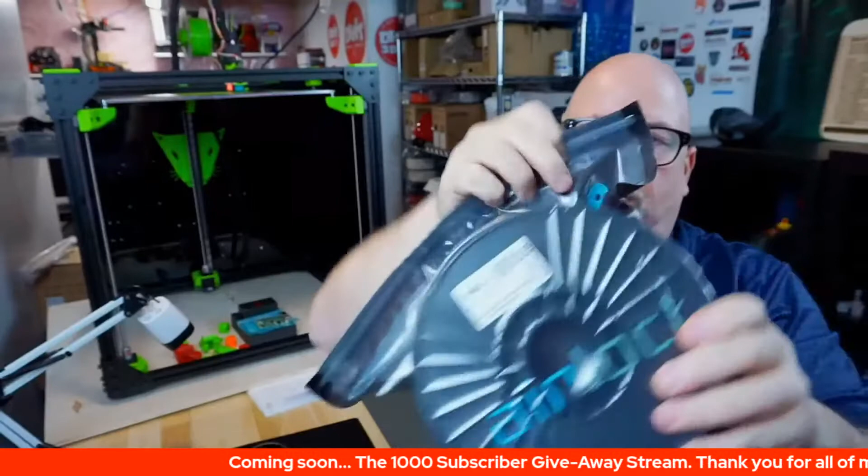So, for instance, there's an open roll of the Jessie PLA that I did. That's been in there for a few weeks now, and it holds that really, really well. You pump the air out from that little spot right in here, and that keeps any air from getting in there.

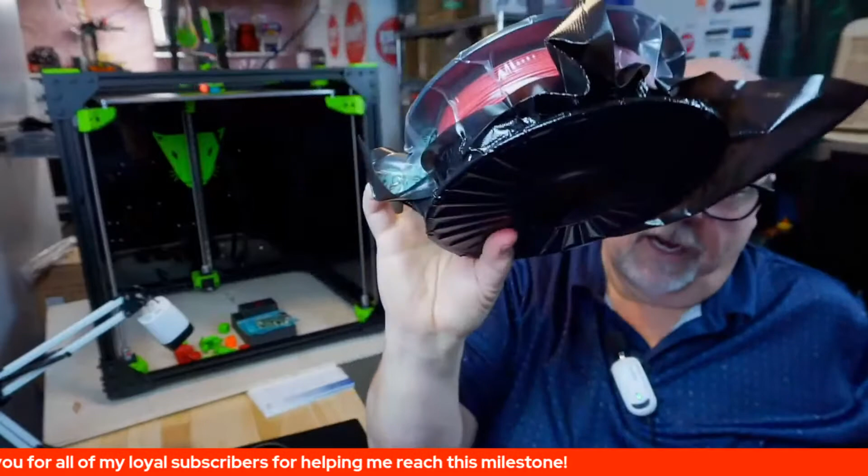So it's not going to dry it out in there, because I didn't even put a desiccant pack in there, because it's useless - a desiccant pack in the middle of here isn't going to hit the filament. But that just prevents any more air and moisture from getting into it. So it works really well. If you look back, I do have a video on that particular system.

Shelf elf duties. There you go.

Maria Webster, message retracted. What did she say?

Let's crank it. 600, okay, 11. Let's just see how fast it'll go. 7, 8, 9, 10, 11, 12, 13, 14... 1500%. I don't think it'll go.

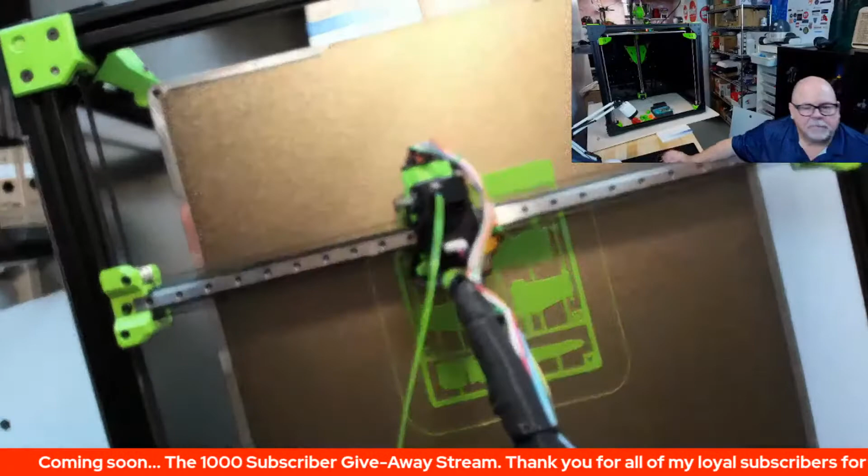Now, who knows? Saw on Facebook that full kits for the Minion are shipping first before mechanicals. Oh. Who knows in this? Jason would know.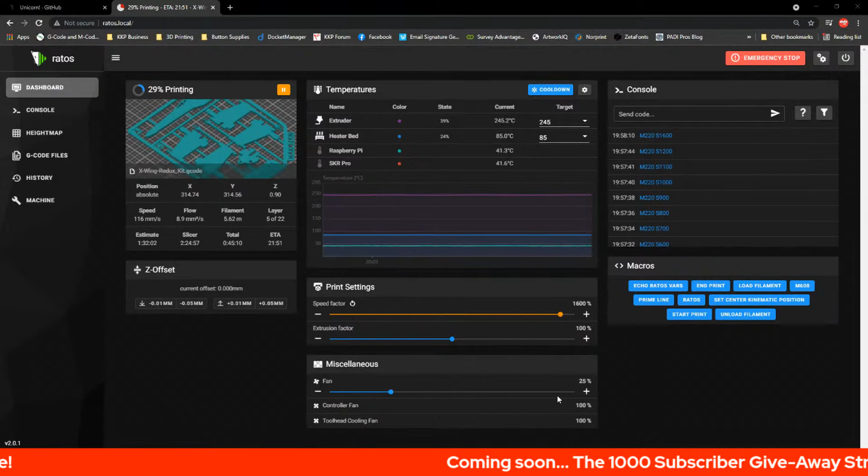Who else? Down below it says controller fan and toolhead cooling fan. So of course my toolhead cooling fan, I'm assuming, is my hot end fan cooling the heatsink. What's the controller fan? Is that the power supply fan? Because it's showing 100% on the controller fan, 100% on the toolhead cooling fan, and 25% on my part cooling fan. But I'm not sure what the controller fan would be. I don't have a third fan hooked up that I know of. So anyway, just curious.

Controller fan would be the fan for the main board, which I don't have hooked up right now. So it's like it thinks there's a fan on there, I guess. Or it's set to be at 100% if there were a fan on there.

Probably wouldn't be a bad idea to put a fan on the main board anyways. So it's running pretty hot.

It and the Pi are about the same. Let's see. They're not. I don't feel a lot of heat coming off of either one of them.

Yeah, it wouldn't hurt to have one. Phantom fan, yeah. It's showing the settings it's on right now. I don't have a fan connected, right? There's one more set of ports there for the fan to go on the SKR.

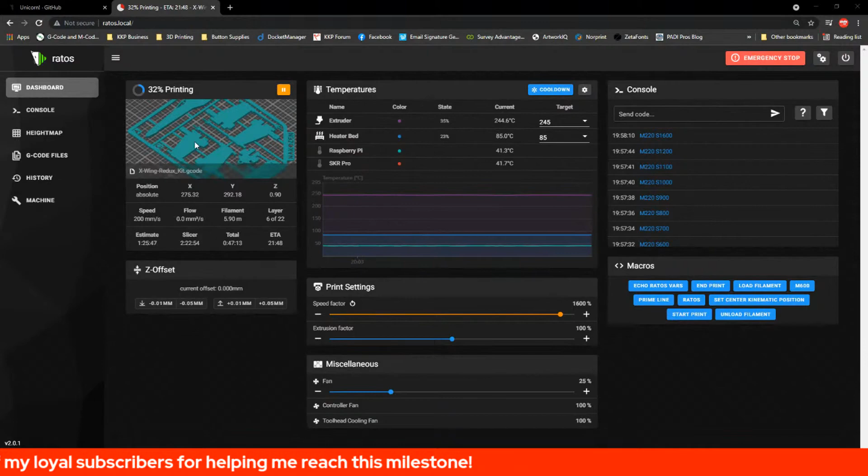So it should finish a lot quicker than its estimated time based on the speed I'm running. So methinks I'm going to call it a stream here because I think we've done a successful job of showing that the RatRig is able to print quite well.

You have two 60mm fans on the back of your V-Core.